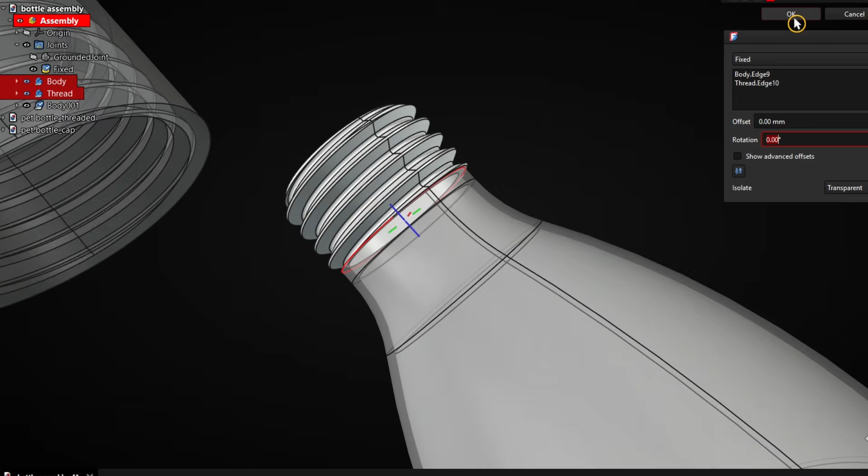When you have created a new document, select the Assembly Workbench. Then create a new assembly and select the Insert Component button. You can also access the button here.

Click on Open File to insert your models. First, select the threaded bottle model. Then click on Open File again and select the bottle cap model. First, click on the main body of the bottle model. Before you insert, you first have to save this assembly document.

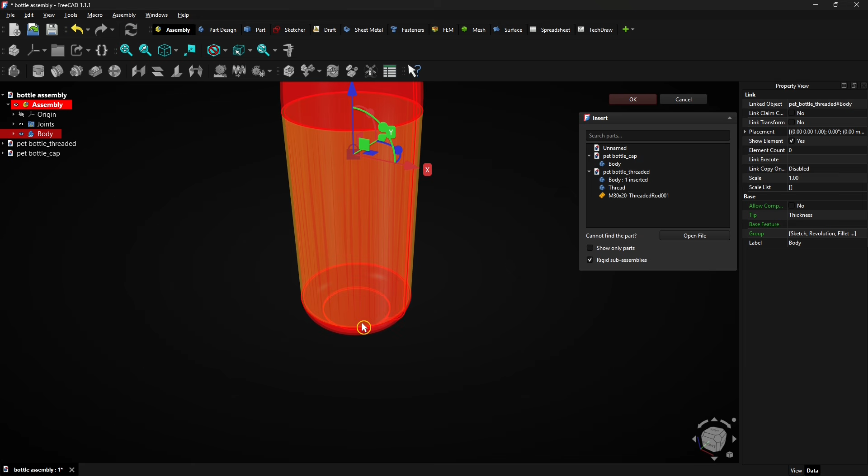Thanks. After the document is saved, the bottle model has been inserted. Now click on this thread body to insert it. You see it's located here at the bottom. Finally, click on the body of the bottle cap to insert it. Then click on OK to finish the model insertion.

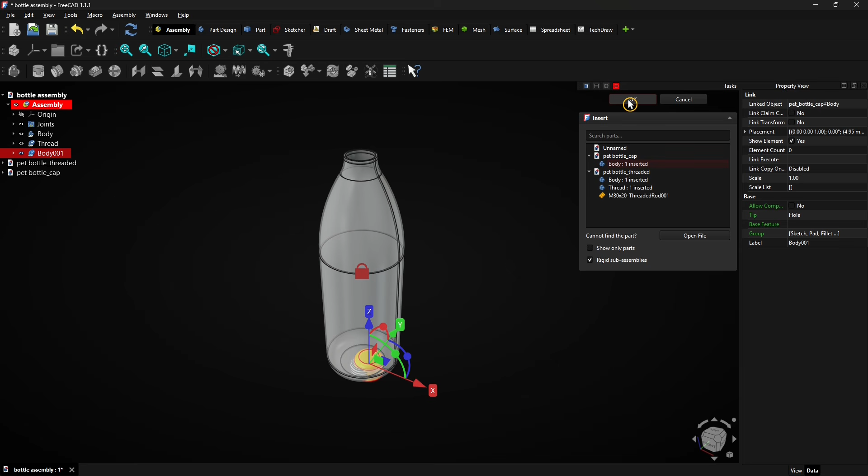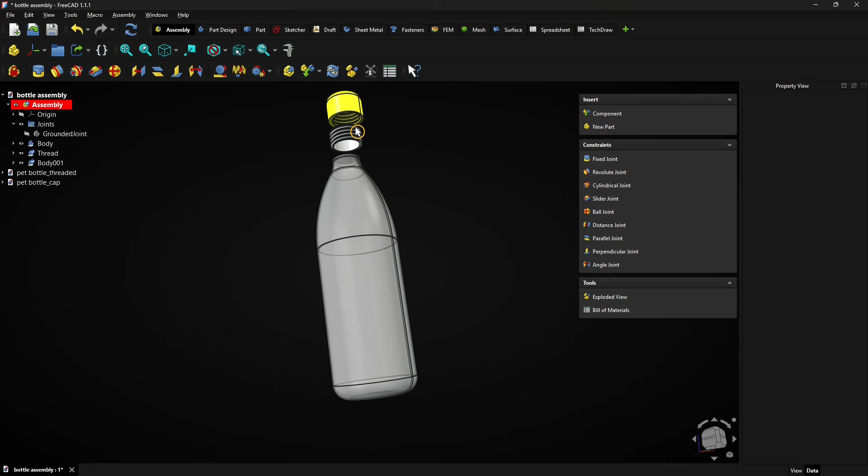This lock icon shows that the part you inserted first is grounded, so it cannot move. To hide this icon, expand Joints in the tree and click on the eye icon. To move a part freely, hold the Alt key together with the left mouse button so you can drag parts to a better position. Now let's add some assembly joints.

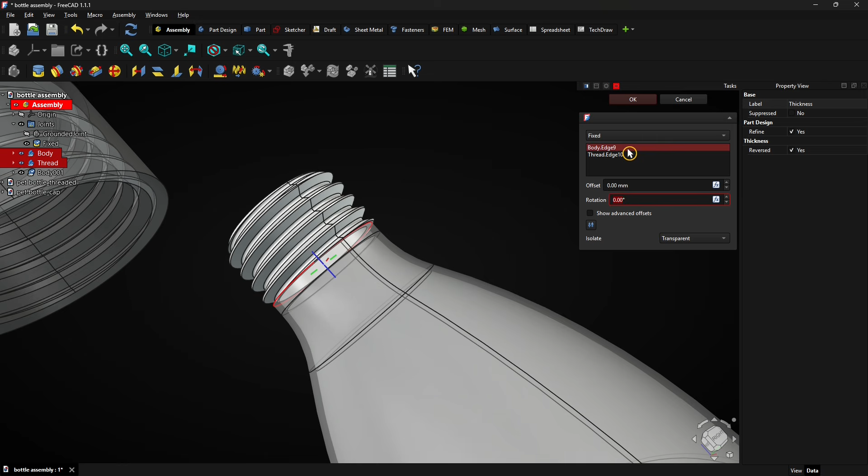Click on these two edges while holding the Control key. Then add a fixed joint. It's not necessary now, but it's possible to add an offset or rotation angle. Click on OK to apply the joint.

To fix the cap on the bottle, select these two edges while holding the Control key. And add another fixed joint.

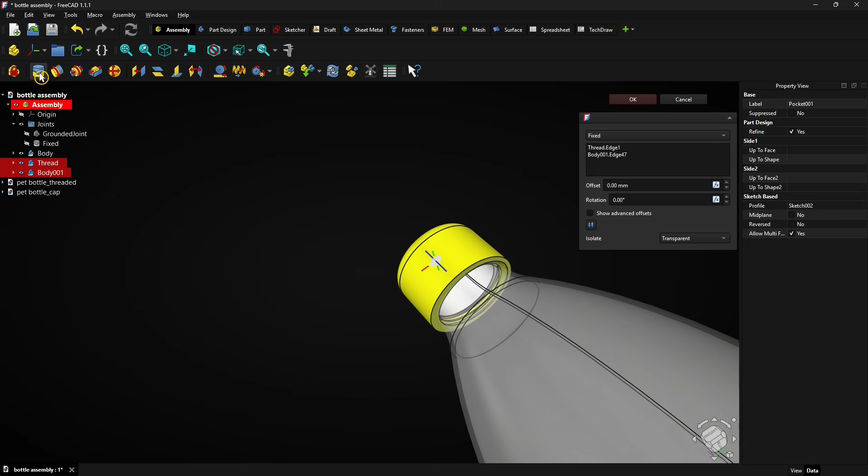To look into the model, click on the View tab and select Clipping View. Select the X or Y plane and rotate the model if necessary.

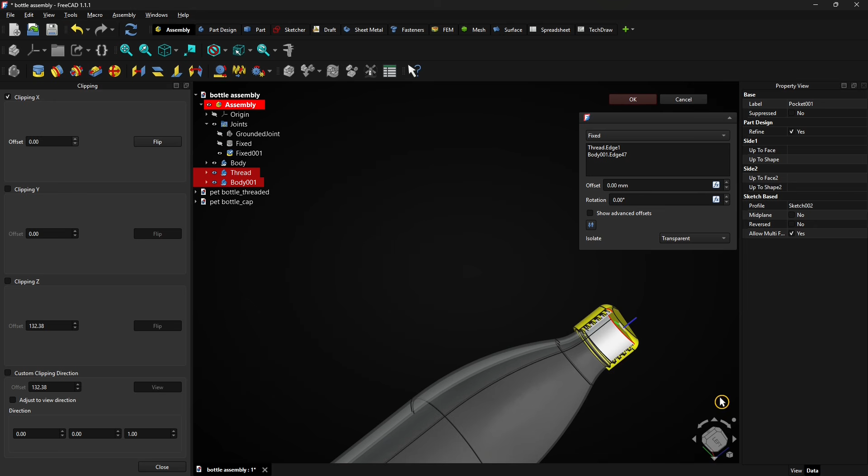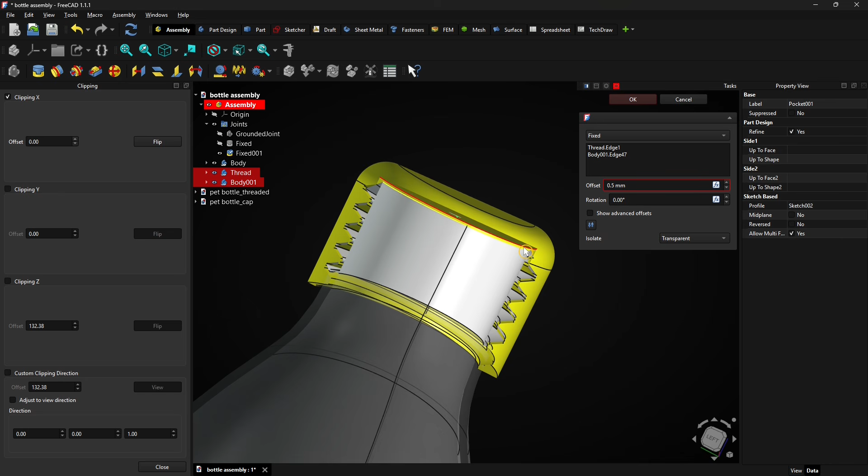To position the cap correctly, you have to add an offset. Enter an offset of 0.5 mm and click on OK to apply. Also close the Clipping View menu.

So this is how a simple assembly works with the FreeCAD Assembly Workbench. A total of 3 parts were assembled: a bottle, threaded neck, and a cap. By clicking the eye icons, you can hide each model.